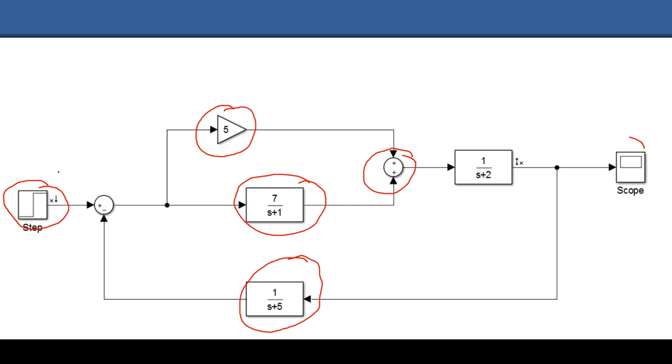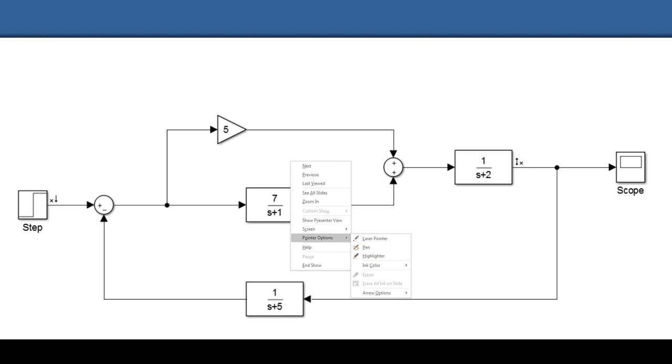So here we can see that two blocks are added together. So the transfer function is 5 plus 7 divided by s plus 1. So 5s plus 5 plus 7 divided by s plus 1 is equal to 5s plus 12 divided by s plus 1.

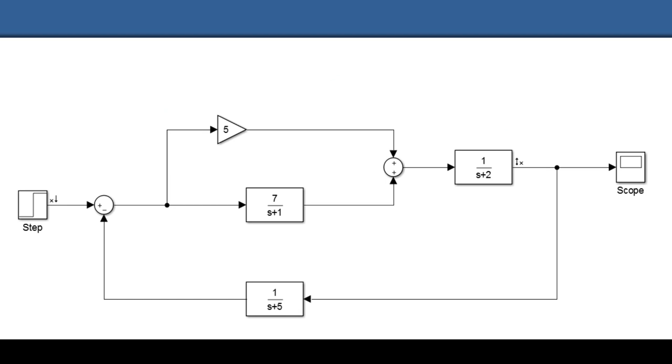Again, that block is in series with 1 by s plus 2. So again, this is multiplied with 1 by s plus 2. So the overall open loop transfer function of the system is 5s plus 12 divided by s square plus 3s plus 2. Let's see how to do this with MATLAB. Let's open MATLAB.

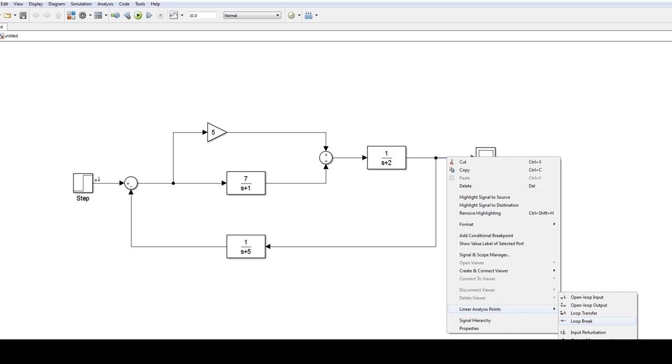See, here I developed the block model in Simulink, and then on the input side just right click here and select linear analysis point, select open loop input. Then move to the output side, right click, again linear analysis point, then open loop output.

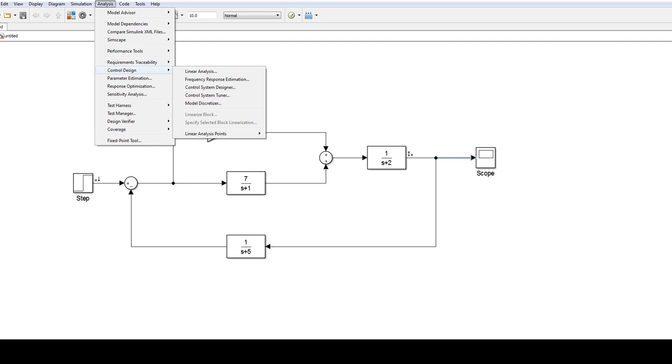Then move to the analysis tab, where you can see under control design, linear analysis. Open that one, then click step. So here you will get the step response of the given system. So here you can see linsys1. Just move this one to the MATLAB workspace, just drag and drop. Already a linsys1 is there, it will override it, so just drag and drop, then move to MATLAB.

So what is our function? linsys1 transfer function, linsys1. So the overall transfer function of the system is 5s plus 12 divided by s square plus 3s plus 2. That exactly matches our result with pen and paper. This is a very simple system, but when you do a very complex system, pen and paper may not work effectively, so you have to use MATLAB techniques to reduce the system.

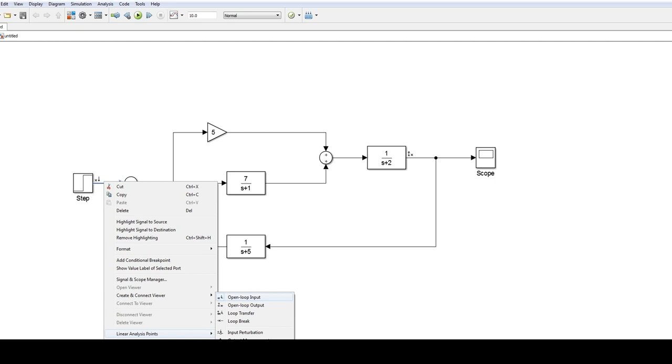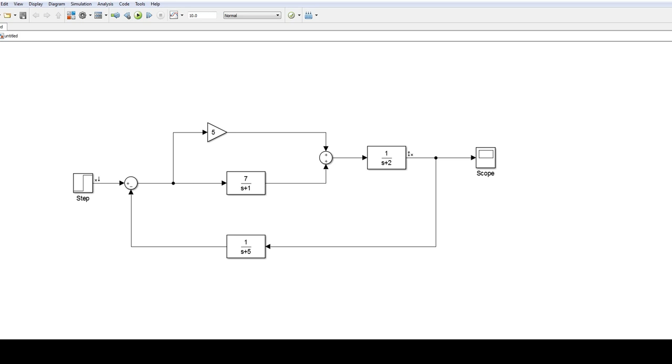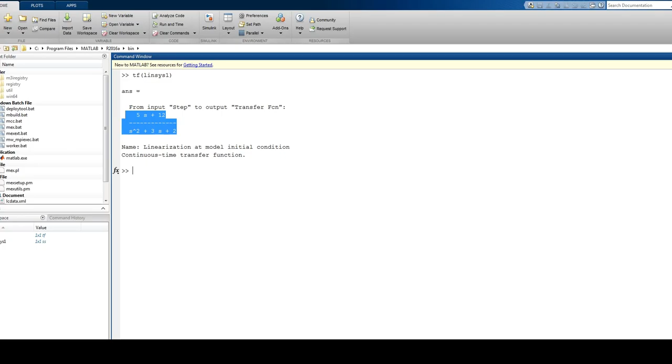So the transfer function of the system is actually the open loop transfer function. It is not a closed loop transfer function, because we used the linear analysis point, the open loop input. So the overall transfer function of the system does not consider this feedback loop. It is an open loop system. So the overall transfer function of the system is 5s plus 12 divided by s square plus 3s plus 2. That exactly matches our result with pen and paper.

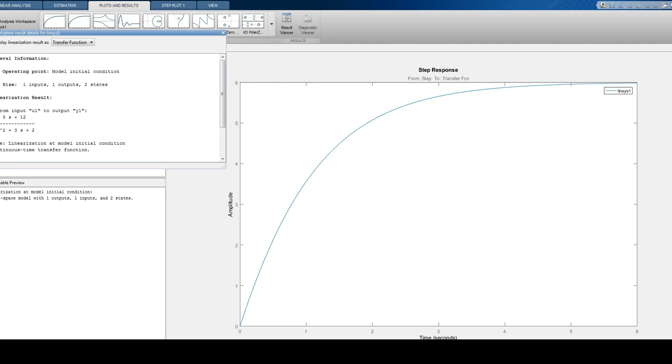Again, there is another way. Without going to MATLAB, you can find the transfer function. Just select this one and move to the plot result and result viewer, then select transfer function. Yes, here you can see that from input u1 to output y1, the open loop transfer function is 5s plus 12 divided by s square plus 3s plus 2. This technique is nothing but the linearization of the system. The system is linearized. That means the system is reduced.

So that is the end of this video. Watch the next video to see how to obtain the transfer function of a closed loop system.